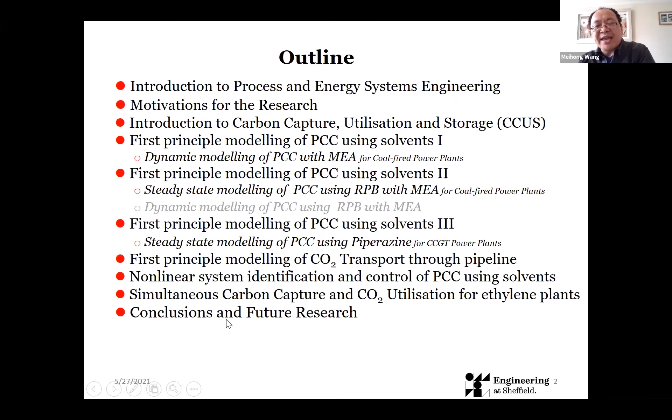Starting from modeling of post-combustion carbon capture (PCC) using solvents: first, dynamic modeling of PCC using MEA solvent for a coal-fired power plant; second, steady state modeling of PCC using a rotating packed bed (RPB) with MEA, again for a coal-fired power plant; third, steady state modeling of PCC using new solvents, such as piperazine, for gas-fired power plants. Then we look at modeling of CO2 transport through pipelines, followed by a brief discussion on nonlinear system identification and control of PCC using solvents. In the end, something very interesting: simultaneous carbon capture and utilization for ethylene plants. Finally, conclusions will be drawn and future research directions pointed out.

Here we start section one: what is a system? Generally, a system is a set of things working together to achieve a function. One example is a wastewater treatment plant, where wastewater comes in and treated water goes out, achieving a function.

Now, what is system engineering? System engineering guides different engineering disciplines, acting as a bridge to make them work together. In other words, system engineering focuses on the system as a whole and emphasizes its total operation.

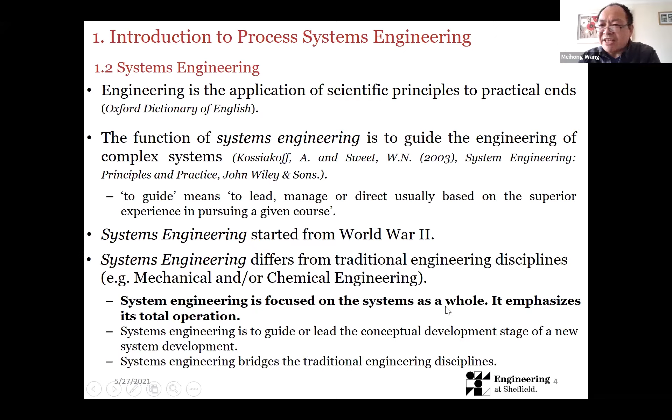Now we come to what's process system engineering. As discussed, it's a body of knowledge within process engineering, dealing with understanding and development of procedures, methods, tools, and people. In other words, it involves training the new generation of engineers and providing system engineering tools like modeling and simulation, even molecular simulation, dealing with process design, operation, measurement, and control.

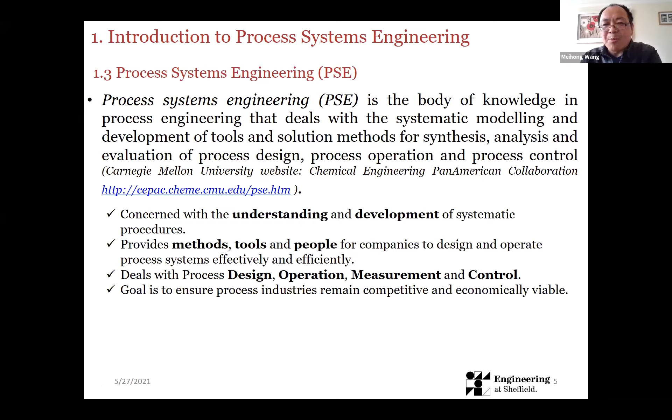Now let's talk about the key features of system engineering. First is interdisciplinary — we easily think about chemical engineering, mechanical engineering, mathematicians, chemistry, and management, and also computing together. It's about using different knowledge areas to work together.

Process system engineering is closely tied with developments in computing, because today computer hardware and software are fast and complex enough to achieve the functions we want. PSE can deal with multi-scale industrial or physical problems.

For example, at a large scale we look at a refinery — from purchasing different crude oils, to transport by pipeline, to the port, then to the refinery, to different products and distribution, which could be hugely complex. We could also go as small as the molecular level, thinking about molecular modeling and simulation. There are also lots of applications in the CCUS area.

Now we look at the motivation for this research. A prediction by the EIA in 2016 suggested about a 40% rise in world energy demand between 2020 and 2040. For energy research, we have a trilemma, the first being energy security.

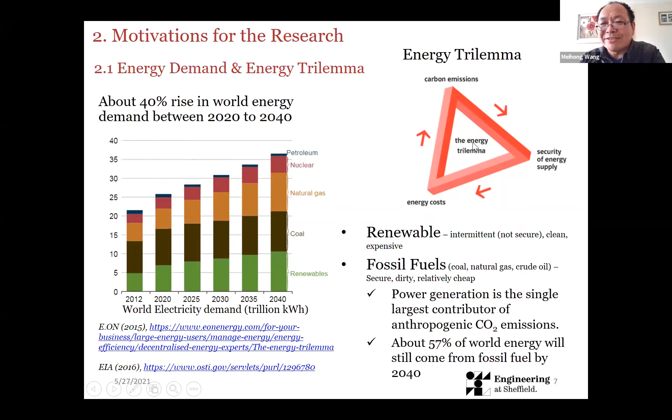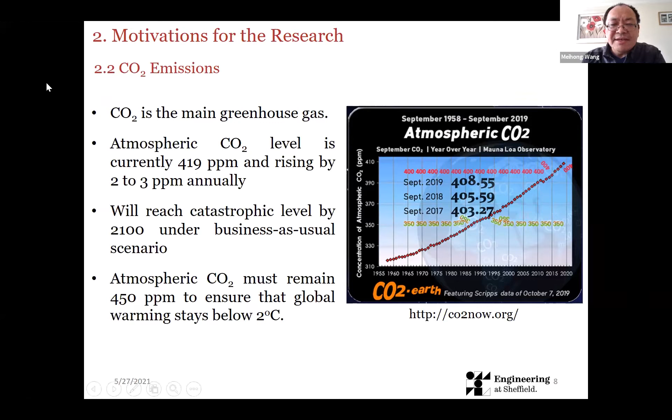Now we look at CO2 emissions. CO2 is the main greenhouse gas. Currently, the atmospheric CO2 level on Earth is around 419 ppm, and it's increasing by about 2 to 3 ppm annually. Now let's look at the potential for climate change.

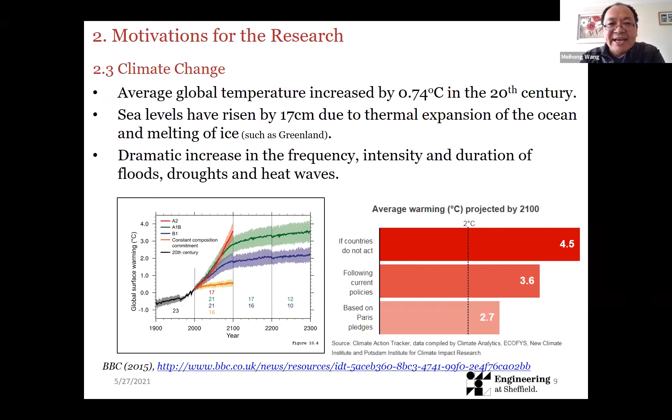If it's business as usual, it will be disaster. The good thing is we have the Paris Climate Change Agreement from December 2015, hoping to keep temperature increase to no more than 2 degrees, or even below 1.5. In the UK, the new target requires the government to bring the whole country's greenhouse gas emissions to net zero by 2050, compared with the previous target of at least 80% reduction from 1990 levels.

Now we look at our research generally. We look at process modeling, simulation, optimization, and control—these system engineering tools. Recently we also did some work in molecular simulation. We look at application areas like power plants, carbon capture, CO2 transport and utilization, and grid-scale energy storage and bioenergy. Today we focus more on power plants and CCUS. Our work is used for process design, process operation, and process control.

We call our group the Process and Energy System Engineering group. At the peak time we had 5 postdocs, from 2017 to 2019. Now we have 3 postdocs and different PhD students—15 currently, plus 1 visiting student from China. That's our picture of researchers, research areas, and research methodologies.

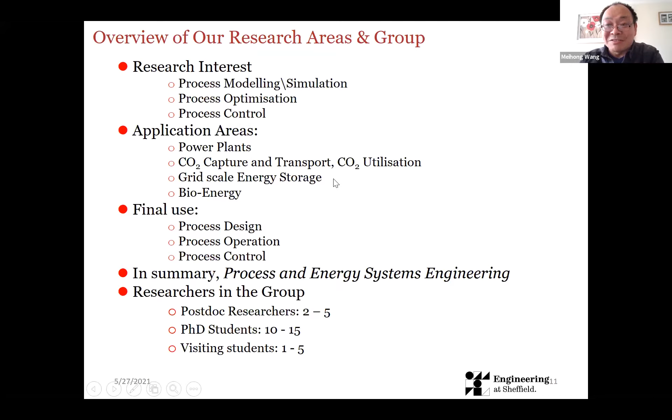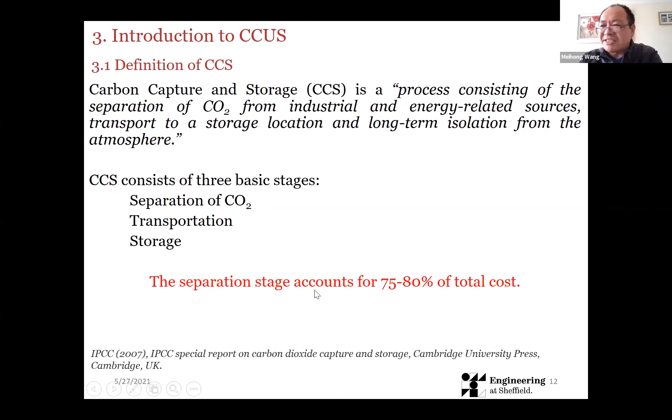The capture stage costs a lot of energy and cost. This is a value chain for CCUS. We talk about where the source is—power generation is a huge source. We also have natural gas processing, industry, refinery, and steel making.

When we capture CO2, how do we transport it? We either use ships like this, or we use pipelines like this.

Where does the CO2 go? Currently in North America we have enhanced oil recovery. A majority of CO2 has to go to storage due to the huge amount captured. But we also have something in between—using new chemical processes and new catalysts to convert CO2 into chemicals or fuels. That could be another point to complement the three destinations or sinks.

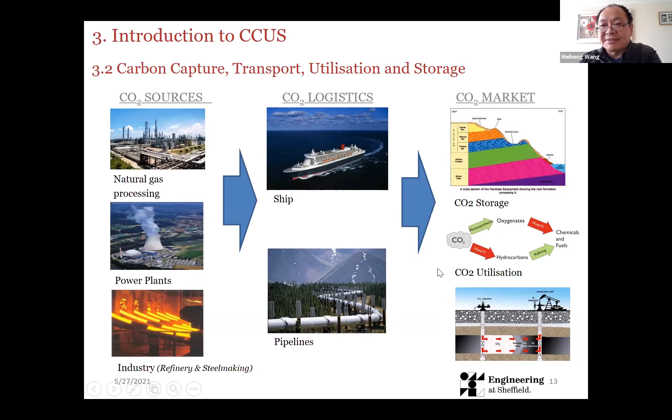Now we come to carbon capture approaches. We have post-combustion, pre-combustion, oxy-fuel, and industrial capture. My work mainly focuses on post-combustion, with some part in industry.

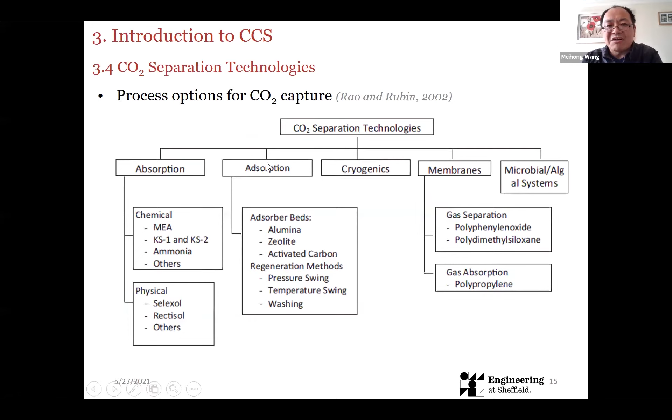Now we go to different CO2 separation approaches. We have using solvents, using solids, using cryogenics, using membranes, or others. I will mainly focus on absorption, especially CO2 capture with solvents using chemical reactions—we call this chemical absorption. We also do a bit of physical absorption, but we will not talk about that today.

Now we go to the block flow diagram for standard CO2 capture based on chemical absorption. We have major equipment such as the absorber and stripper. We also have a condenser and reboiler, and a cross heat exchanger. These are for the pre-processing of flue gas before it enters the process.

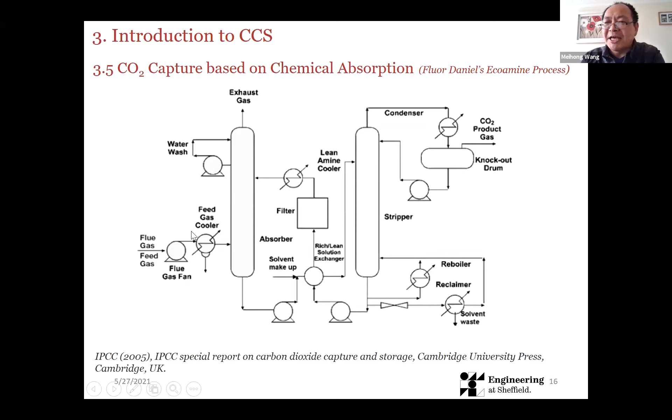Now, whenever we do system engineering, we must not forget that everything comes from practice. So therefore we look at pilot plants, to provide data, to provide insights that we can rely on.

In 2008 to 2009, we started to collaborate with RWE nPower for research in carbon capture. They had a facility capturing 1 ton of CO2 per day. In 2012 they changed direction, and this facility became the UKCCSRC PACT facility in the suburb of Sheffield.

Then we have this one in Texas at Austin. This pilot can capture around 3 tons of CO2 per day, and is very popular for generating lots of experimental data widely used worldwide. We have another successful example in Canada, Boundary Dam SaskPower, capturing around 4 tons of CO2 per day. I reviewed these in early 2011.

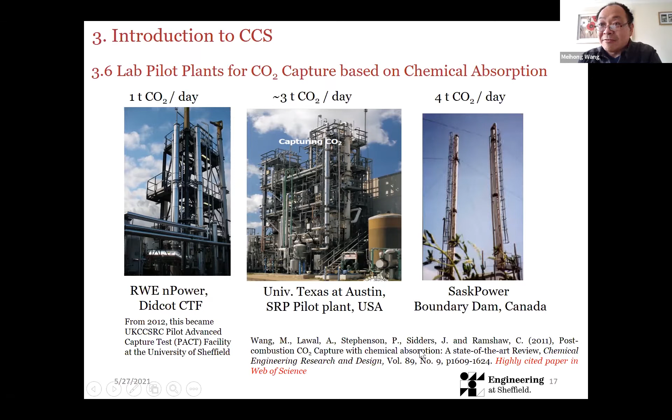This paper has been cited over 1,000 times so far. We also look at other facilities like Dong Energy in Denmark, 24 tons per day of CO2, and Ferrybridge, which is quite big—100 tons of CO2 per day—around 2013, 2014, 2015, for a very short period, like 2 years.

And we have another very big one in Norway, TCM—Technology Center Mongstad—which can capture around 200 tons of CO2 per day.

Then we look at commercial deployment of the technology. In Canada, they have the Boundary Dam project, which can capture 1 million tons of CO2 per year, commissioned in October 2014. The main point for me to mention is this is the first large-scale deployment of CCS technology into power plants—coal-fired power plants.

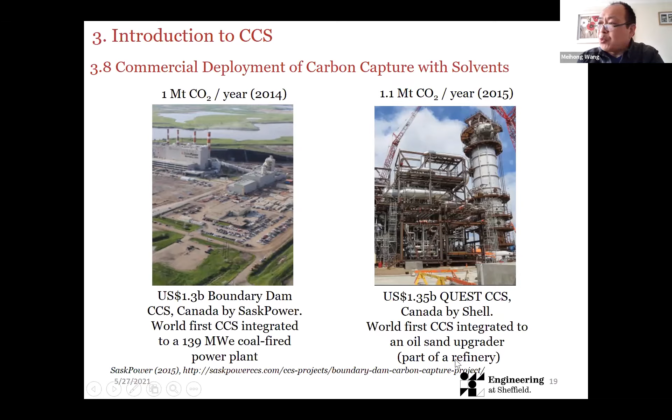This one is the Quest project, again in Canada, run by Shell, capturing 1.1 million tons of CO2 per year—the world's first CCS integrated into part of a refinery, which is an oil sand upgrader.

Now we look at our research.

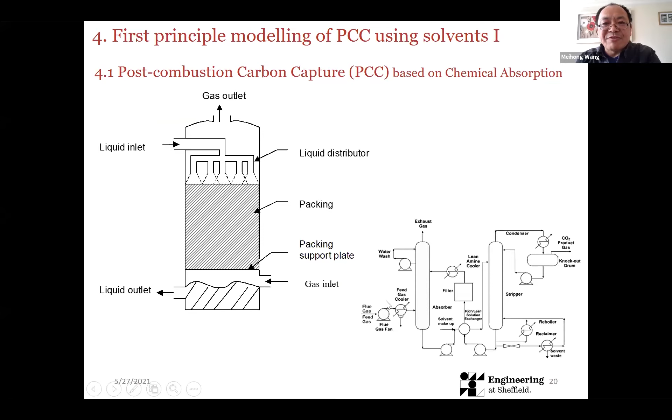The first bit is first principle modeling of PCC using solvents, which we talked about in the process we introduced just now. Now we look at the complexity of levels when we do modeling. We have different considerations regarding mass transfer and chemical reaction, so we have different models, looking at rate-based models or equilibrium-based models.

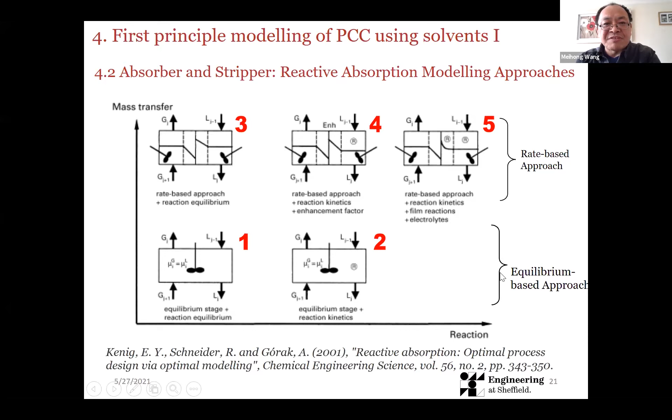We also look at our work in GPROMS model builder, which is a rate-based dynamic model developed based on two-film theory. I would say GPROMS model builder is a very powerful platform to develop these kinds of models.

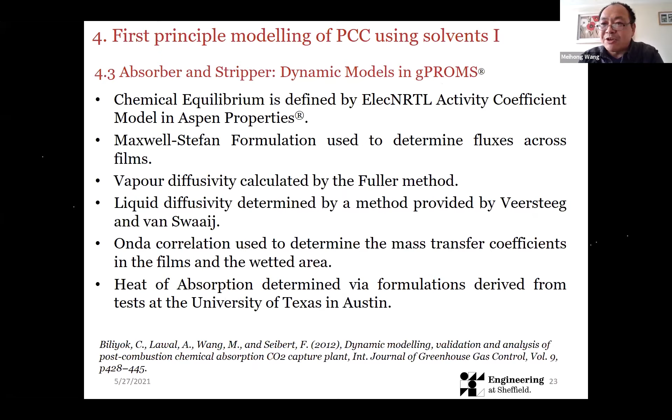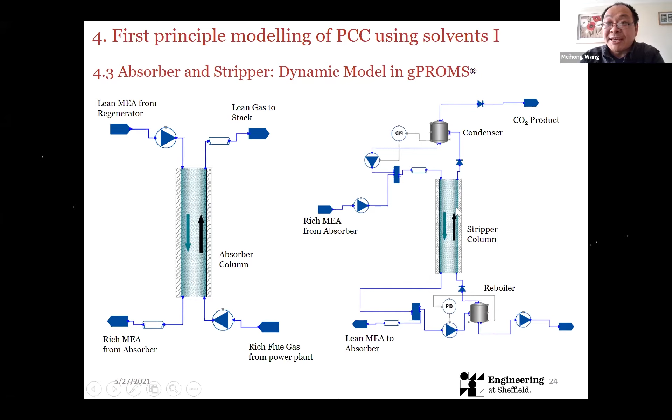We collaborated with PSE Limited, Professor Costas, and developed a series of research from 2007 to 2010, 2011. Here is the flow sheet as it looks in GPROMS, with an absorber model and a stripper model in dynamics.

Whenever we do a model, we want to validate it to see whether the model makes sense. Currently, my personal observation looking at different publications is that models are generally validated very simply from one or two aspects, not robustly.

For this model, we did different research and used Dugas 2006, the experimental data from Texas. We chose very different cases and looked at different CO2 capture levels.

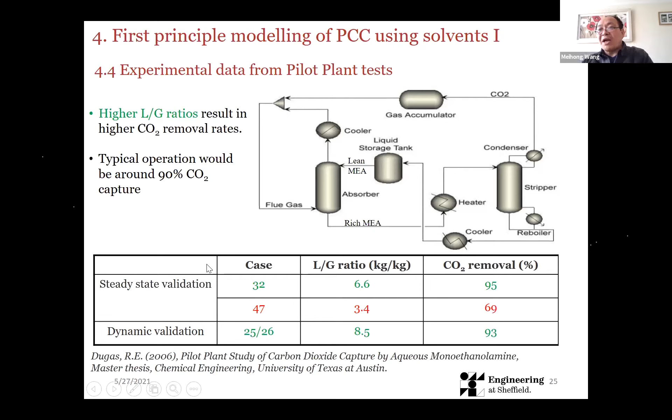We also found some data showing dynamic transitions from one case to another. We carried out the validation and found quite satisfactory results for the temperature profile and rich loading compared with experimental data. In addition to the steady state model validation, we also looked at the dynamic model validation.

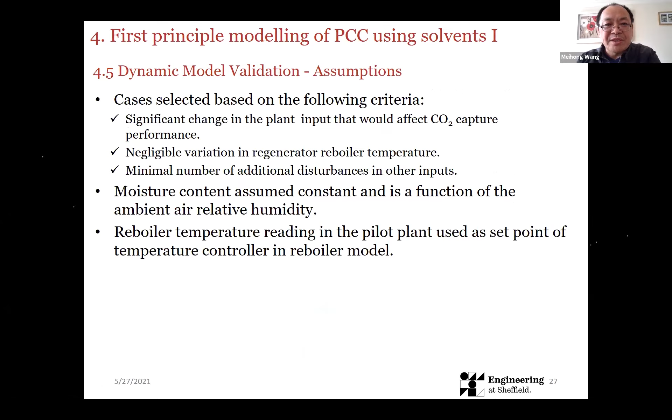Again, lots of papers generally didn't bother to think about how to validate things dynamically. We did this one quite early in 2011 and published it in 2012. This is the whole flow sheet in GPROMS model builder.

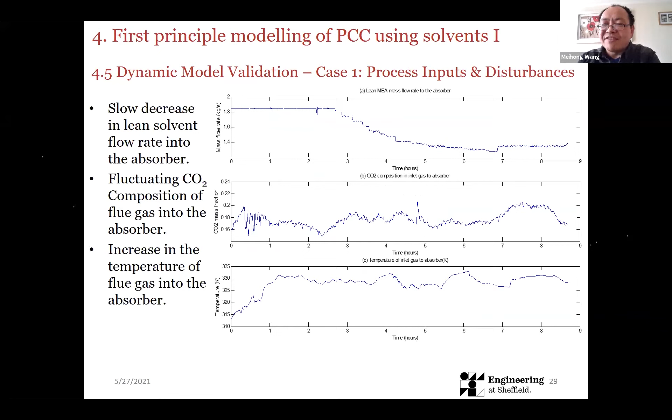We selected data provided by E.ON from the facility at Didcot at that time, and looked at what the model predictions compare with lab measurements. We looked at temperature profiles over a period of 8 to 9 hours, and we are glad to say the trend matches very, very well.

We also looked at the reboiler duty, which also changed very clearly, and the trend is very good. We looked at the CO2 concentration in the treated gas and found it changes consistently, but with a small gap.

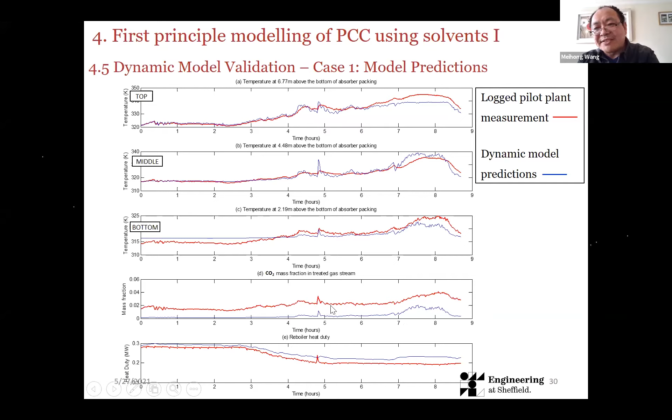We tried to find why. There are two reasons in our mind. One is we assume chemical equilibrium happens between MEA, the solvent, and CO2 reaction. Actually, it takes a bit of time. Even though the reaction is fast, the assumption could be very idealized.

Another reason could be our wetted area estimate being a bit higher than the actual contact area, things like that. But we are not 100% sure, we just predicted what would happen. I provide more details here, so if you have interest, you can look at these papers.

Then when we have a validated model, how can we use the model for process analysis? In the years 2009, 2010, 2011, we did lots of analysis using the validated model.

For example, in one case we looked at when flue gas ramps down because of power generation requirements. If we keep the lean MEA, the lean solvent, flow rate the same, how would that affect the operation of the absorber using a packed column? We can see the dynamics after 100 seconds, 300 seconds, 400 seconds, until 1000 seconds.

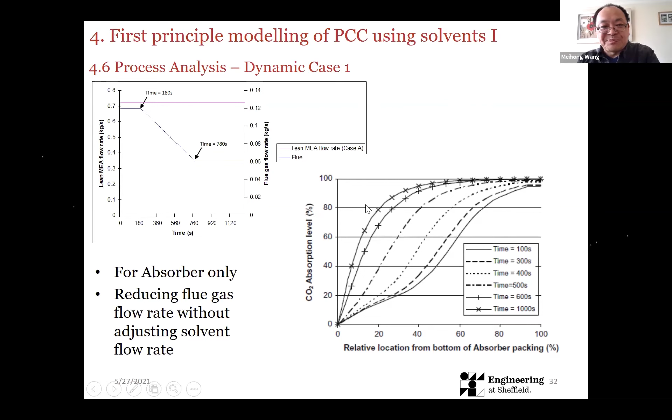So we can see how things change in this curve because of the increased L/G ratio. Then we looked at another scenario where we change the lean solvent flow rate in the same ratio, in other words keeping the L/G ratio nearly the same for this case. We can see the operation of the absorber would be more stable.

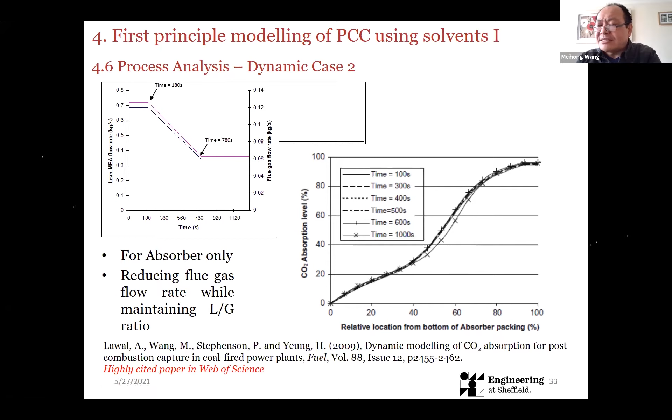This work, which we published, is highly cited in Web of Science. This is just an example, but we also analyzed the water balance and other scenarios like dynamics.

Now we move to scale up. The company E.ON, when they funded the project, asked us: what would happen if we use solvent-based carbon capture for a 500 megawatt subcritical coal-fired power plant? That's a question raised in 2007, and we answered it in 2010, 2011.

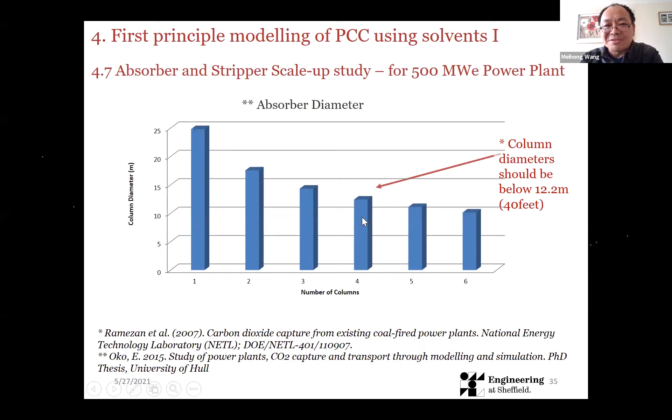For the scale up, we looked at different decision making, like if we choose different columns and sizes, what could result. In the end, we also calculated the mass transfer coefficient, mass transfer flux, and the surface area of packing required, as well as the packing volume required.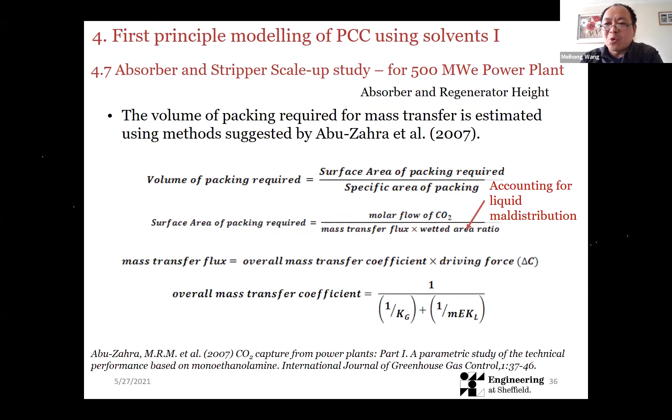Now we can say for a 500 megawatt subcritical coal-fired power plant, when we have 600 kg per second of flue gas, and if we want to capture 90% of the CO2, then we need 4 columns for the absorber and 2 columns for the stripper, at a very big size of roughly 12 meters in diameter.

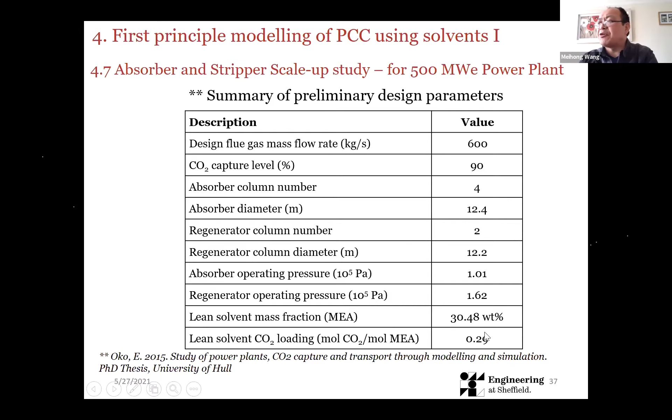We use 30% weight percentage of MEA, and assume the lean loading at 0.29. Then we look at how to integrate through the modular side, looking at the flue gas from the power plant, pre-processing it, and bringing it into the inlet of the absorber.

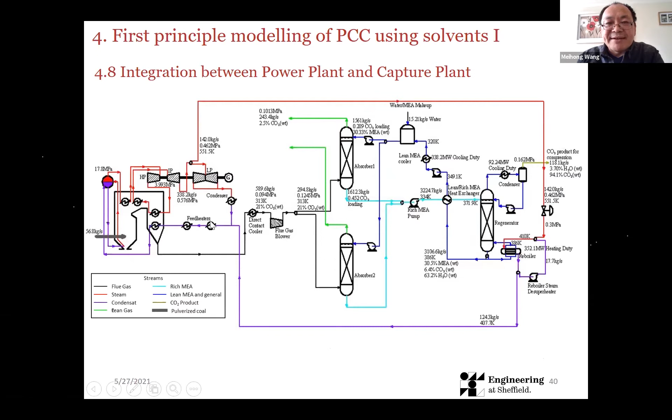Then we look at how to take steam from a power plant into the carbon capture plant, and we look at the integrated system - this is the power plant, this is the carbon capture plant.

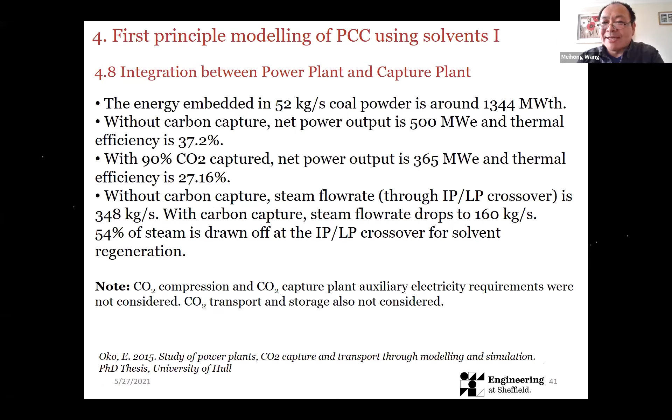Then we look at the static and dynamic performance. We can see that such a plant, which originally has thermal efficiency around 37%, could drop to 27%. The reason is we take steam out from the LP and IP-LP crossover, and that flow rate originally was 348 kg per second, now dropped to 160 kg per second.

Dynamically, if there is a call from the national grid, this power plant has to drop its output from 442 to like 418. Then the flue gas - obviously we have to reduce the coal burning rate.

Therefore the CO2 flue gas flow rate will reduce, and the steam from the power plant for carbon capture regeneration solvent will reduce. Dynamically, we can see here the different variables.

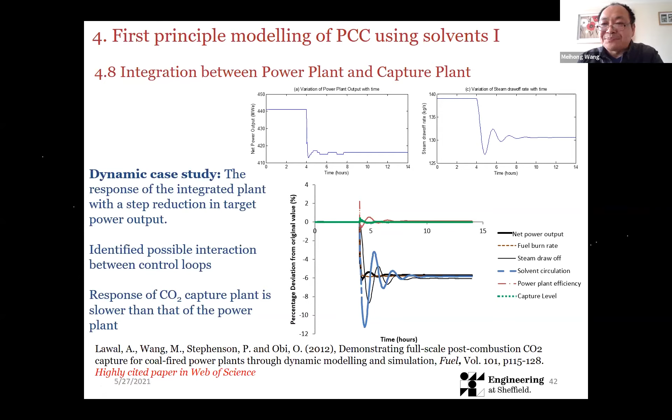How do they work together? We use hours as the time limit here. If we use minutes, we'll see it's a very slow process to achieve the new steady state. Therefore we can say clearly it's a fast power plant with a very slow carbon capture plant.

This work was funded by RWE npower from 2007 to 2010. We also had the NERC project, funded by the Natural Environment Research Council, in collaboration with Imperial College London, University of Sussex, and British Geological Survey, from 2010 to 2014.

Now we move to the second part: first principle modeling of PCC. We look at why we need process intensification, as mentioned from Lawal et al. 2012.

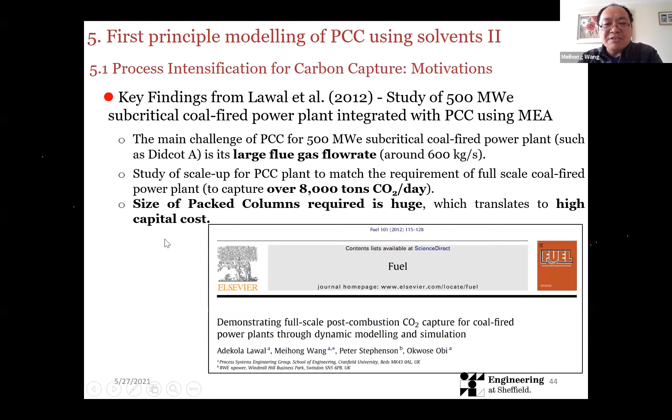In a study of a 500 megawatt subcritical coal-fired power plant, we see 600 kg per second of flue gas, which is huge, capturing over 8,000 tons of CO2 per day. The size of the packed columns as absorbers and strippers are huge in size, which translates into very high capital cost.

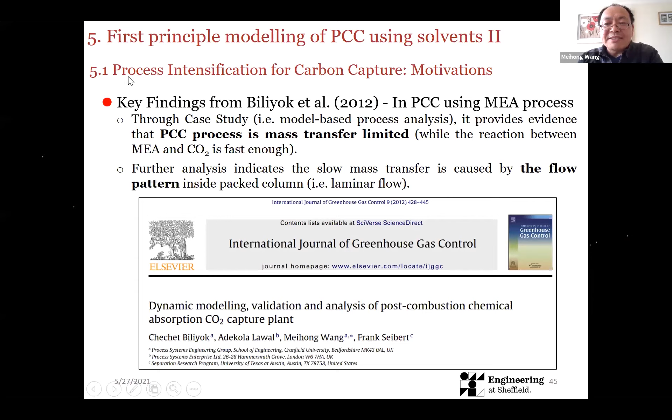We move to key findings from Biliyok et al. 2012. We look at the process, which is mass transfer limited, because the reaction of MEA with CO2 is very fast. We look at why it's mass transfer limited - because of the flow pattern inside the column.

Then we look at the dynamics, again from Lawal et al. Here the dynamics are very slow. Why slow? Because of the very high liquid to gas ratio needed to achieve 90% CO2 capture, which is roughly 5.5 to 1 or 6 to 1.

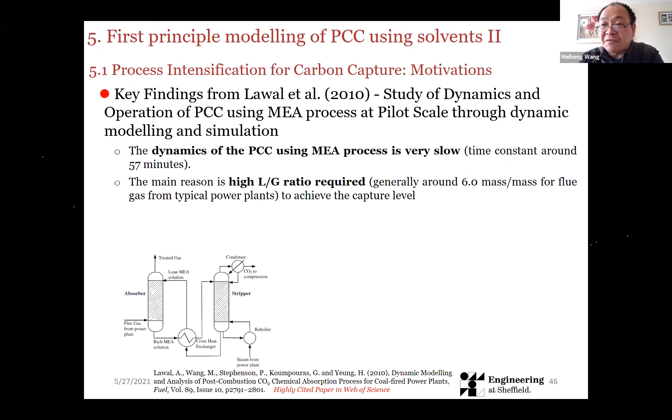As we said, very slow dynamics would be an operational challenge when the carbon capture plant is linked and integrated to the power plant. So again, we look at intensification.

Process intensification is a strategy for making major reductions in the volume of processing plant without compromising its production rate. PI also refers to reduction in the number of units, by combining two or more unit operations into one, resulting in reduced capital and operating costs.

RPB, rotating packed bed, is one of the PI technologies, proposed by Professor Ramshaw in 1979 - worldwide the first person to talk about process intensification technology. I was lucky to meet Professor Ramshaw from 2006 to 2012 when I was at Cranfield University, because Colin was a visiting professor at Cranfield University.

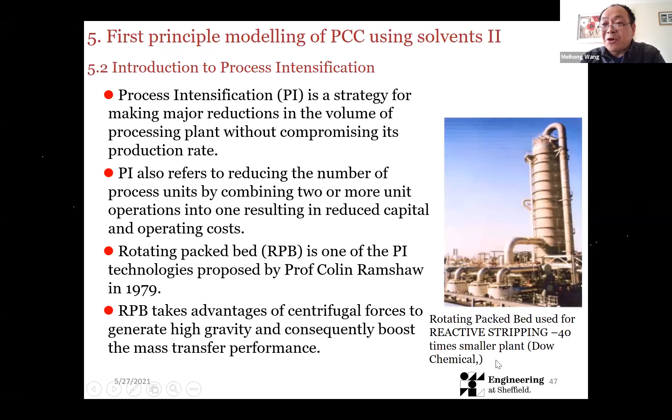RPB takes advantage of centrifugal forces to generate high gravity and consequently boost mass transfer performance. On the right-hand side, you can see we have a huge column - this is a used packed column. And this is how small it could be using the RPB. This figure was from Dow Chemicals, for their reactive stripping.

Now we look at the grant we have done - in 2014 we won a big grant, 1.27 million.

I was the PI for the whole consortium, in collaboration with Imperial College London, University of Sheffield, and Newcastle University. Over 4.5 years, we looked at how to use RPB technology for process intensification in carbon capture.

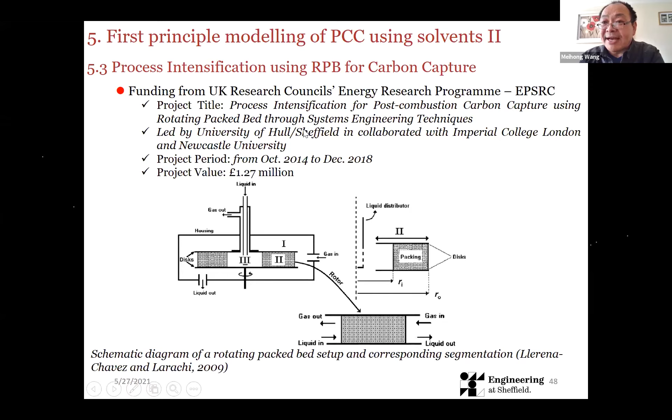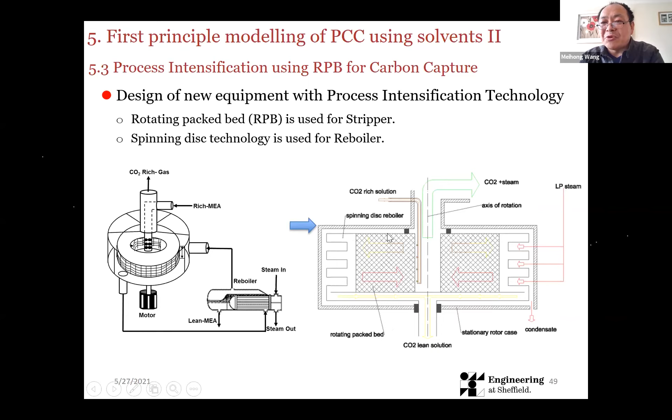For this work, we looked at design of the new equipment. For the RPB absorber, it's straightforward. For the RPB stripper, it's very challenging, because if you do an RPB body for the stripper with a huge reboiler, that would look very awkward. So we looked at how to put these two together using spinning disk technology, using steam outside, and then providing the source to the RPB body. This was the design, done in collaboration with Professor Colin Ramshaw and Dr. John Lee, and we achieved the design.

Then with the new equipment, the RPB absorber, we looked at how to recover the energy from the system. Then we proposed a new block process flow diagram. This was put in a review paper in 2015.

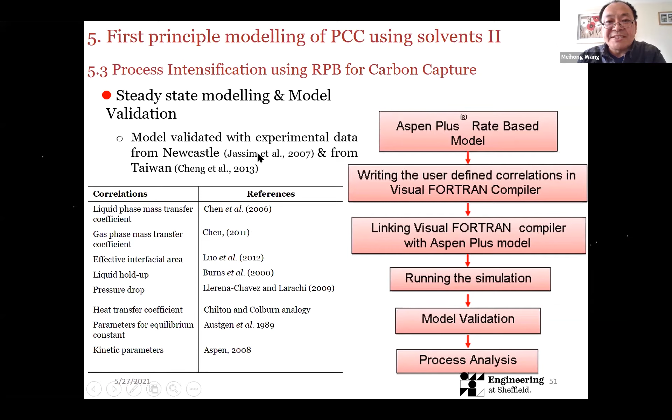Once we have the equipment and a new process, how can we assess the effect of RPB technology for intensified carbon capture? Here we used Aspen Plus, wrote Fortran routines, dynamic linked together, ran the simulation, did the validation with experimental data from Newcastle, Jassim et al. 2007, and from Taiwan, Cheng et al. 2013. Then we looked at how the size of the equipment can be reduced.

Here are the preliminary conclusions. The packing volume in the absorber can be reduced 52 times, and the absorber column size could be reduced like 12 times. For the stripper, the packing volume can be reduced like 30 times, and the stripper size can be reduced 8 times.

With 32.9% MEA, we found the energy consumption is similar. Why similar? Because originally the reboiler duty would be lower, but now because of rotating, we have to provide energy for rotating. So that's why we say it's comparable.

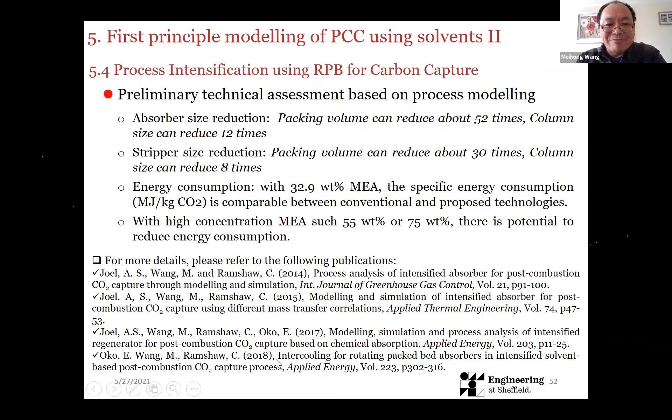However, looking at the future, with RPB technology we can use higher concentrations of MEA, like 55%, 65%, or even 75%. Now we are working very hard to determine an optimal point, which is not easy. Then we can quantify the performance of the new values for these scenarios. If you have interest, we have these papers published recently, and you're welcome to check them.

Now we move to first principle modeling, part 3. We look at packed columns, but with new solvents. My previous two sections looked at MEA only, because MEA is the standard solvent used in evaluation of different technologies. Now we look at a new solvent, piperazine.

Why do we turn our eyes to piperazine? Because it reacts with CO2 solvent so fast, has higher CO2 absorption capacity, slightly lower regeneration energy, and is also more stable thermally and under oxygen environment. We look at 30 to 40 weight percent of piperazine.

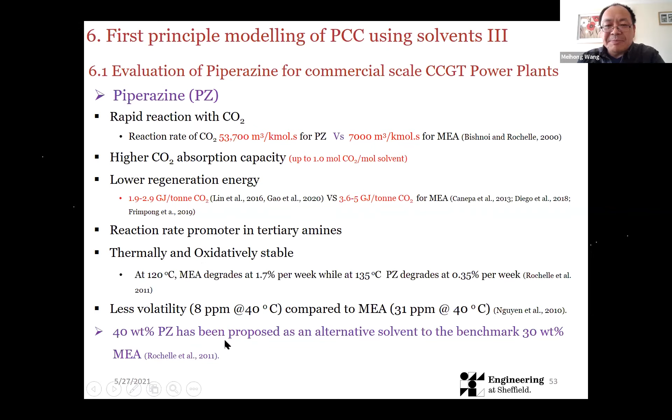Here are the details of how we developed the models, and how we validated the models using data from Texas, Austin, and Plaza and Rochelle published in 2011. They shared lots of data, which is a very big advantage for our modeling researchers.

Then we looked at model validation. We are very confident the model makes sense because the error is quite small. Then we looked at how to do scale-up of different configurations into the commercial size for a 250 megawatt NGCC power plant.

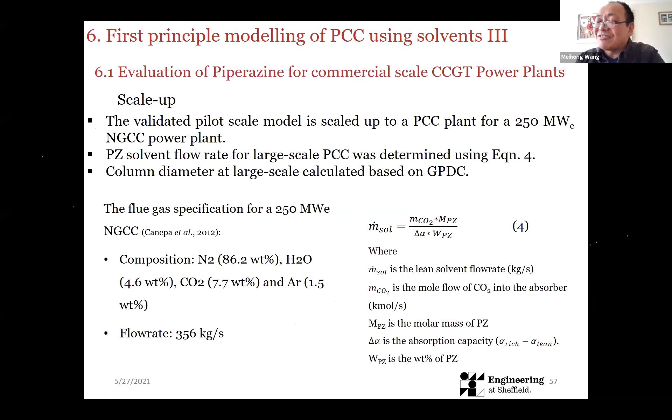We sometimes call it a CCGT power plant, meaning natural gas fired combined cycle power plant. Here is the size, here is our context. We consider two different solvents: MEA at 30%, and PZ at 30%, 35%, or 40%.

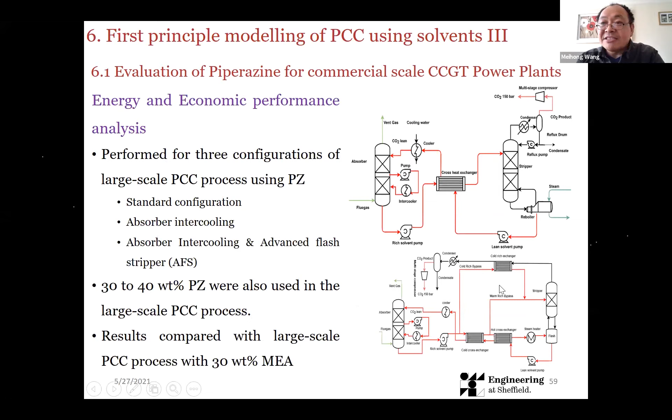We looked at three different scenarios: one standard configuration, one with absorber intercooling, and one with absorber intercooling plus advanced flash stripper (AFS). So now we look at 30% PZ versus 30% MEA.

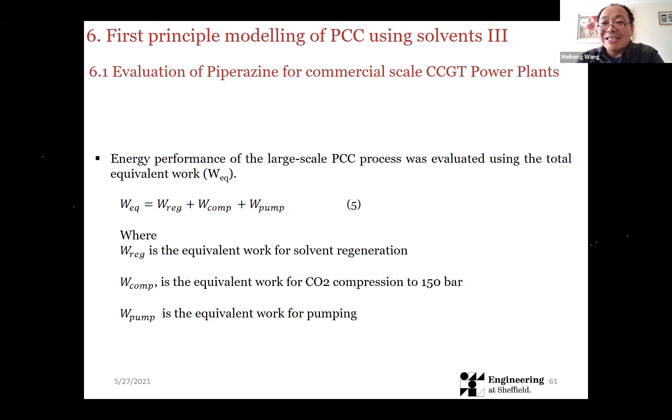Now let's look at how we define the energy consumption, because now we have more details regarding evaluation of PZ at large scale. For the standard process, you can look at different concentrations: 30% MEA, and 30, 35, and 40% PZ, along with the energy consumption here.

Then for intercooling, we have this table, looking at PZ with intercooling and AFS. We got a conclusion because our group participated early on, in 2013. Looking at a packed column using MEA at 30%, the energy consumption could be as high as 5.34 gigajoules per ton of CO2.

And now if we use PZ at 40% with intercooling and AFS, we can achieve as low as 2.76 gigajoules per ton of CO2. Now we can say the latter is 47% lower, in other words nearly half, compared with 30% MEA with standard configuration.

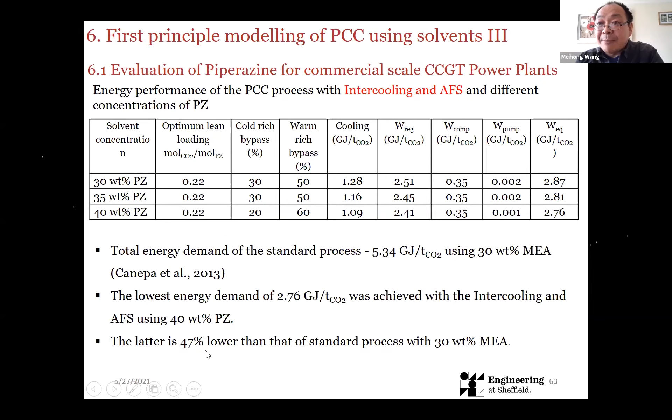Now we look at economic index. The conclusion is, originally if we use 30% MEA with standard configuration, the cost could be like $61 per ton CO2 captured. Now using PZ at 40% with intercooling and AFS, we can achieve a reduction to $34.65 per ton of CO2. This is 42% lower, close to half compared with 30% MEA.

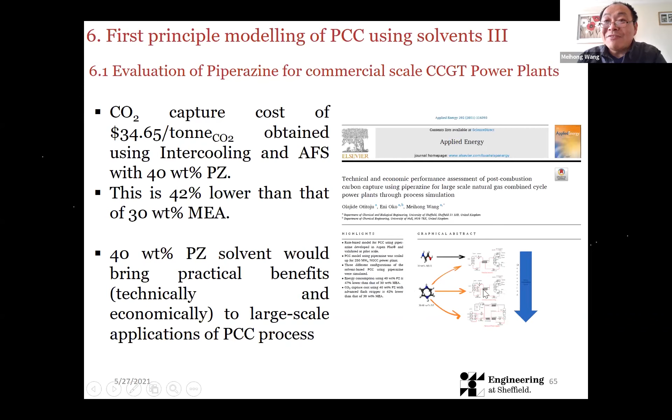So therefore, we can confidently say 40% weight percentage of PZ solvent brings practical benefits, technically and economically, for large-scale application to PCC. This paper was very recently published in Applied Energy. This figure demonstrates what we want to say: two different solvents, three different configurations, and how to reduce energy consumption.

From 2012 to 2016, I was based at University of Hull. So then we look at the Humber region, the UK's largest CO2 emission area, and we look at the large scale emitters, meaning over 1 million tons CO2 per year. We found 12, like Drax power plant, Ferrybridge, Hatfield, and Saltend—names industrial people will be very happy to hear. They are at different locations with different amounts. How to design the CO2 transport pipeline to achieve benefit in the long term.

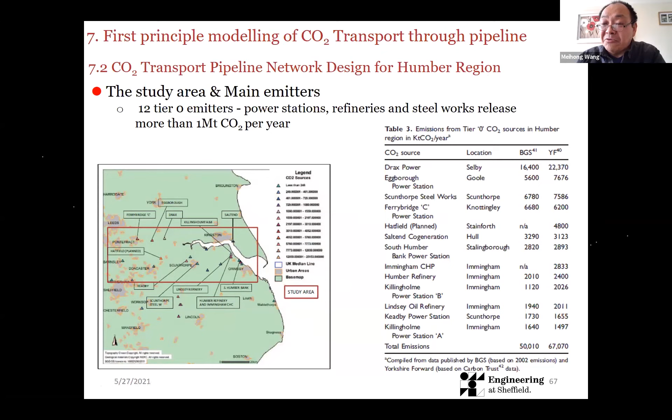So we look at the solutions, option 1 and option 2. Option 1 assumes we use one pipeline. Scenario 1 is a fixed pipeline diameter, and another is a varied pipeline diameter. Another option uses 2 different pipelines 10 years apart—in other words, phase 1 in the blue line and phase 2 in the red line, with phase 2 being 10 years after phase 1.

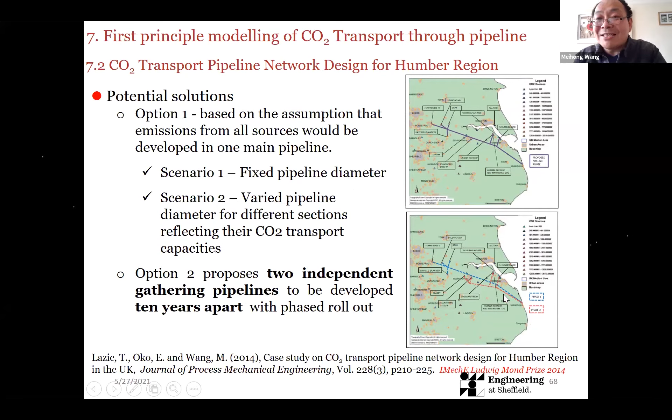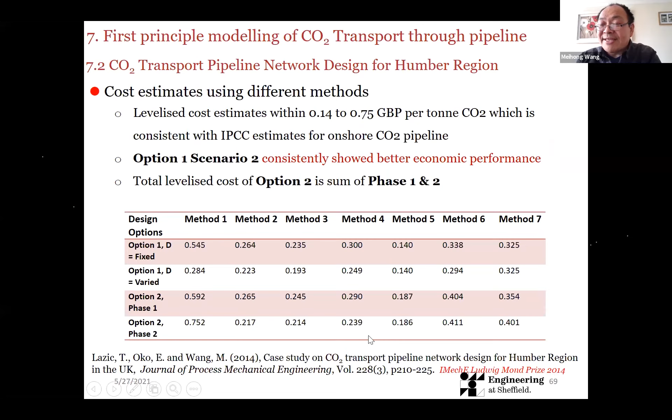We can say option 1, scenario 2 consistently shows better economic performance. The work was done in 2011-2012, improved in 2013, and published in 2014. We spent lots of time talking to industry and people to improve the quality. In the end, we attained the IMechE Ludwig Mond Prize in 2014 to recognize our contribution to the process industry.

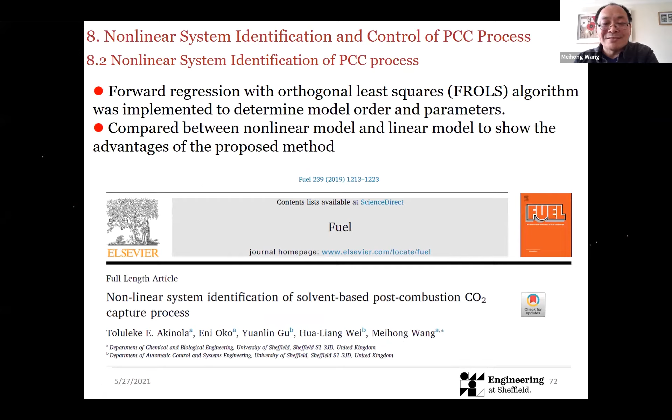And then we do linear system identification at different local points, and piece together. The whole model is nonlinear, but in the region it will be linear. Then we look at another study, which chooses a NARX model, nonlinear NARX model, and we use forward regression with orthogonal least square algorithm to determine the model order and parameters. We compare the benefits of the nonlinear model with the linear model to show the advantages of the methods. If you have interest, you can look at details here.

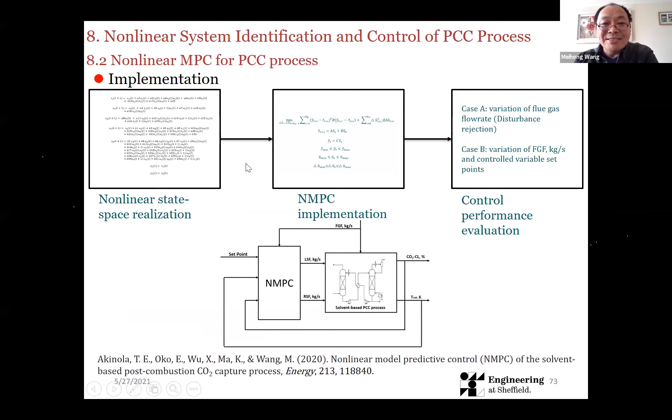Now we move to using nonlinear MPC, model predictive control, to control the process. We can see how it's implemented, and look at different cases. What are the benefits? Look at the integral squared error—the benefit is that ISE would be much lower for our nonlinear MPC.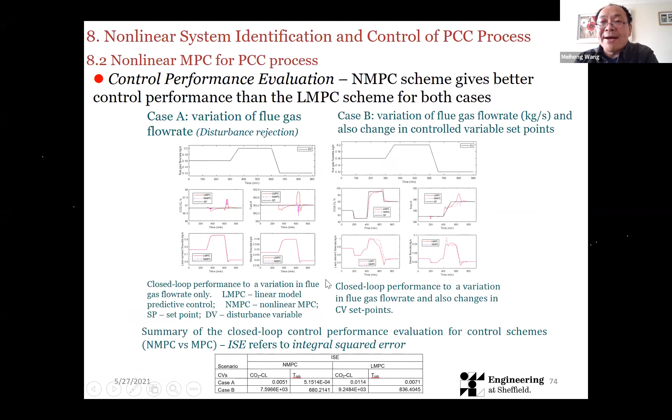Now we move to a very recent study on simultaneous carbon capture and CO2 utilization for the ethylene plant industry. Global ethylene demand is around 170 million tons per year, and manufacturing 1 ton of ethylene generally produces 1 to 2 tons of CO2, depending on the feedstock used, either naphtha or propane. The thermal cracking furnace is the heart of any ethylene plant—here is one example of a thermal cracking furnace.

If you have an individual ethylene plant far away, and you want to do carbon capture and storage (CCS), you would need to think about CO2 transport and storage.

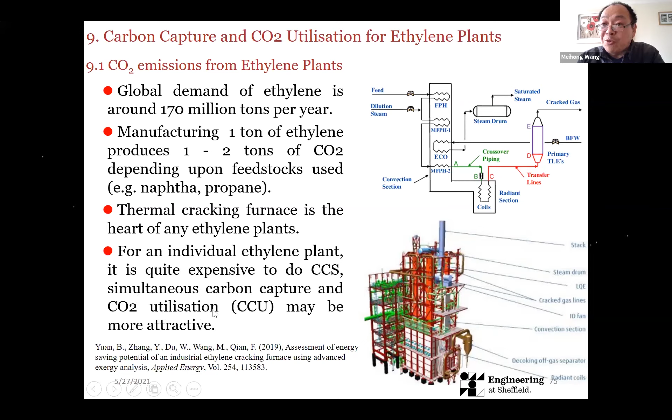However, if there is a small plant, you do simultaneous carbon capture and then convert CO2 into chemicals or fuels. That would also be very attractive.

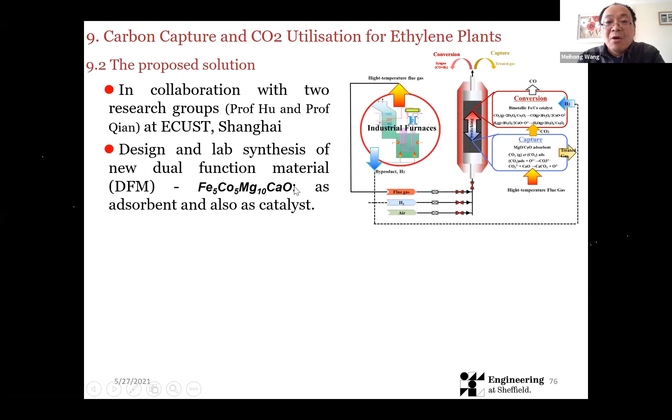So that's why, in collaboration with two different research groups in Shanghai, we developed this new research - very novel design and lab synthesis of new dual function materials. Why do we say dual function? We mean as adsorbent and also as catalyst.

The new process integrates calcium looping and reverse water gas shift reaction, implemented in one fixed bed reactor operating at 650 degrees. Step 1, carbon capture using adsorbents for flue gases. Step 2, switch to excess hydrogen, and then under iron and cobalt catalyst, in situ conversion into CO, producing syngas - a mixture of hydrogen and CO - which can be further used for Fischer-Tropsch synthesis.

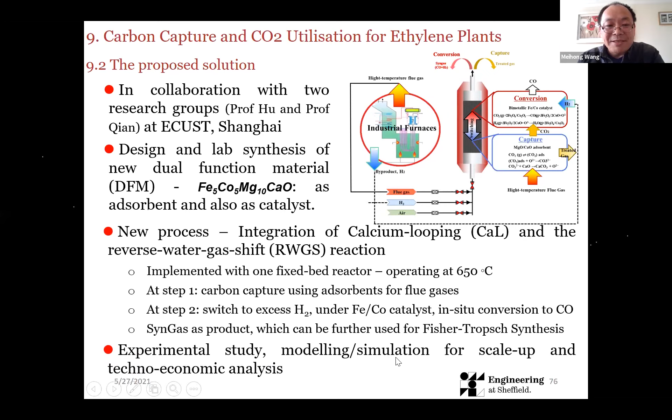The research was done through experimental study, molecular simulation, modeling and simulation for scale up, and also technical economic analysis. This is the lab experiment using 10% CO2, 90% nitrogen as simulated flue gas for carbon capture.

We explore the stability of the material, DFM, looking at 10 cycles. From this figure, you can see over the 10 cycles the CO2 capture capacity is always around 9 mole per kg of sorbent. The CO2 conversion is always around 90%, up to 90%. And CO selectivity is also close to 100%.

Then we look at the scale-up study. Initially, the work was done using 0.25 grams of the material in a very small fixed bed reactor. Then we use 100 times bigger, 25 grams, and using a much bigger fixed bed reactor, we look at 2,000 milliliters per minute of the flue gas.

Above this limit, we can no longer use lab facilities to do experiments due to safety concerns, because hydrogen is easy to explode. So we use modeling and simulation to help scale up into commercial scale for a 100,000 tons per year ethylene plant. Now we need a huge packed bed, 2.5 meters in diameter and several meters in length, and we need 50 tons of the material.

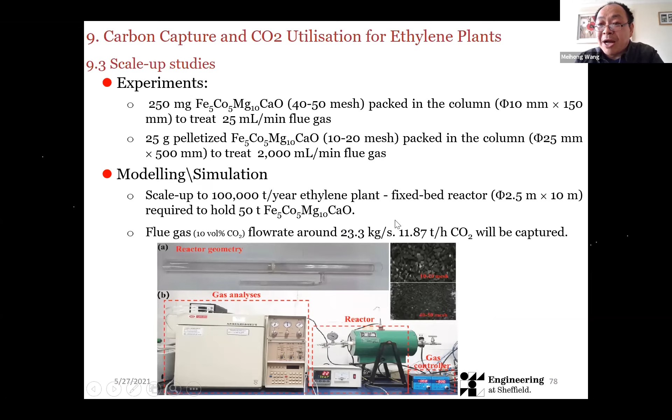The flue gas flow is around 23 kg per second, and we capture 11.87 tons of CO2 per hour. We look at technical economic analysis for this large scale ethylene plant, assuming 8,000 hours per year, which is common sense for a plant. The cost is around $165 per ton of CO2.

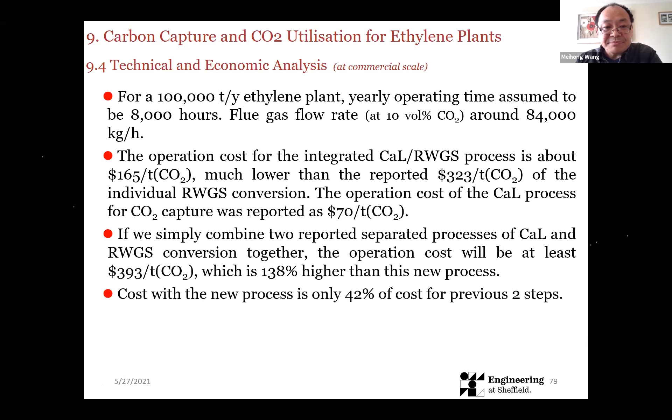This is in comparison with individual steps. If we do RWGS and CaL separately, that could be $393 per ton of CO2. That means with the new process, the cost is only like 42% of two separate steps. So this paper was very recently published in Energy Environment Science, with an impact factor over 30.

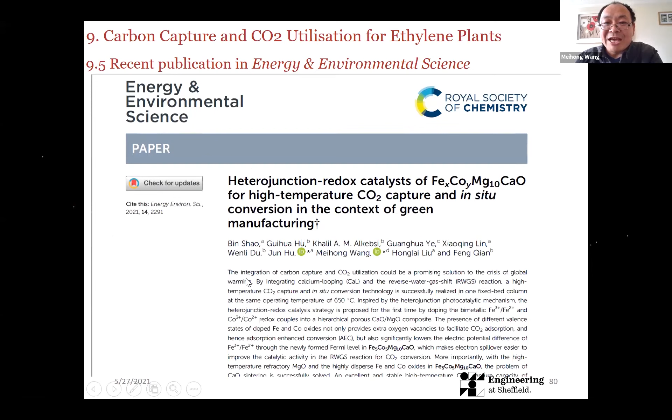Okay, if you have interest, you are welcome to look at the details. And now it's time to draw a conclusion for what I have talked about, mainly through first-principle modeling to data-driven modeling,

using modeling as a tool to predict the performance. And of course, we must always work with people doing experiments through power plants, and we must also talk to industrial people to get insights. We also look at process intensification - it has great potential to reduce costs for carbon capture, and more importantly, to reduce the footprint of the carbon capture plant. Then for CO2 transport, preliminary design for pipelines for the Humber region.

And simultaneously, carbon capture and utilization could be attractive for some cases - for example, if you have a small plant in an isolated place.

Now we look at the impact of our research. Our model has been used by Uniper because they fund our research, for their internal R&D. And for PSE Limited, when they developed GCCS, they used part of our detailed carbon capture model, very detailed, as part of their simplified GCCS model.

We also have received different awards, like the Ludwig Mond Prize and the Sargent Medal. In 2019, the Nigerian Prize for Science invited me and my former postdoc to be the joint winners. And these are the highly cited papers in this area.

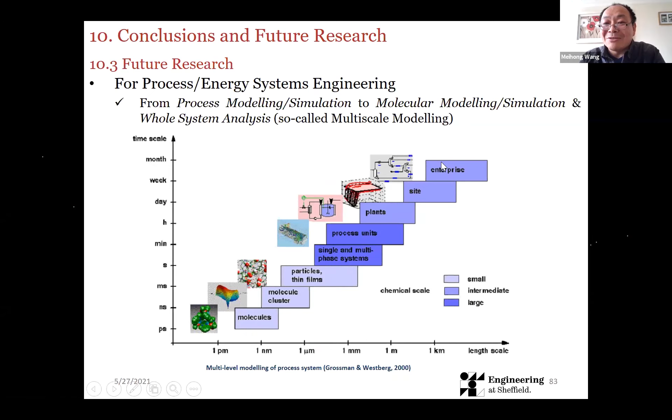I always think about different tools, from process modeling, simulation, optimization, to molecular simulation, and then to large-scale simulation and optimization. And then we look at future directions.

We are working on carbon capture for power plants and industrial processes, BECCS, and recently a group of researchers, including Professor Jon Gibbins and myself, put in a proposal on BECCS, and also direct air capture and CO2 utilization. That's why we have 15 PhD students working in very different areas.

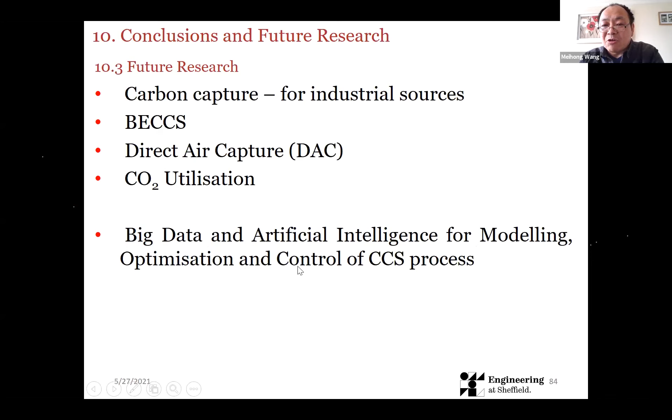Very recently, earlier this year, we started work on big data and artificial intelligence for modeling, simulation, and optimization control of CCS processes. This is a new grant from the EU, European Commission, under the RISE scheme, Research and Innovation Staff Exchange, from August 2021 to 2025. We should have started in January 2021, but because of the pandemic we couldn't start.

We use a fancy name called Optimal, so that's easy for anybody to remember. Our work is on smart and CO2-neutral olefin production through artificial intelligence and machine learning. These are the work packages.

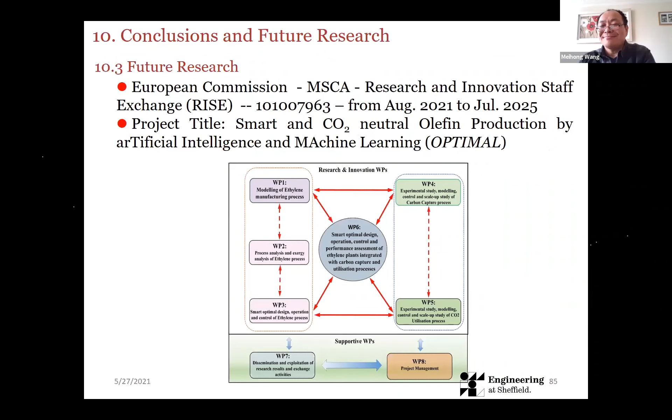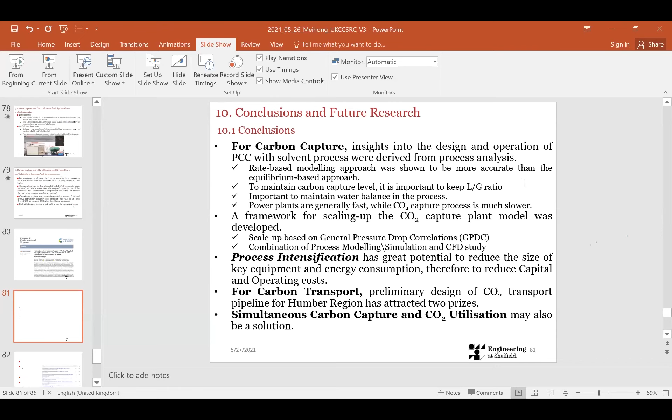Okay, thank you, Meihong. Well, we don't have very much time left, so we better move quickly to questions if you don't mind. There's a couple of questions in the chat. Bart de Groot, are you still there? Could you come on and ask your question? It's quite a complicated question. Are you there, Bart?

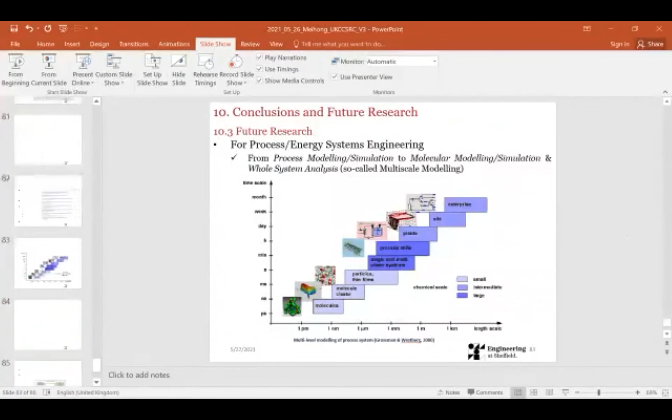Sorry, the question is about status, and also about corrosion issues with high concentrations of MEA. Oh yes, that's a good problem. When we did the work, we discussed how higher concentration of MEA would have a higher corrosion rate. The solution could be using a coating, because Professor Rennshaw reminded us to use a coating on the surface of the material. That could be a solution, but I'm not an expert in corrosion. I believe in CBE at Sheffield we have a young colleague, Dr. Kara Campbell, who is a big expert in this area.

Okay, and another question from Ashrafi, if you want. Oh, Inna's there, good. Did you want to follow up on that, Inna? Did you have any comments? I just wanted to ask, what is the status? Are you continuing to work with this rotating packed bed? And you probably heard about the Norwegian company 3C also having this technology.